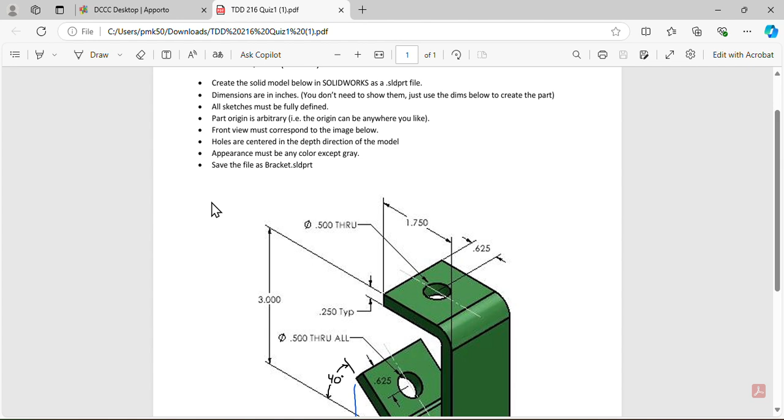Hey everyone, I'm going to go through one possible solution to the quiz that we had last Monday. Of course, there's different ways to do it, and feel free to ask me in class if you want to discuss other methods. In fact, after we finish lesson 7 this coming Monday, I'll show a really easy way to do it. But for now, I'm going to show methods that I know everybody has learned up to this point.

So this is the isometric view, and first thing with any object is you want to think about what the best profile is, what that first sketch should be. And in this case, it's the front view, which has the most shape. So we're going to start on the front plane, and then the next thing you want to think about is where the origin is going to be.

So the origin, as it says in the bullet points, is arbitrary. We could make it anywhere, but we want to constrain it to that sketch somehow. So I'm just going to make it in the lower right corner, on the outside or inside, we'll see.

Okay, so jumping into SolidWorks, if I click New, I've got the training templates in here now, so we have millimeters and inches. If you're just seeing the 3 default templates, click the Advanced button in the lower left corner, and this is going to be a part inch.

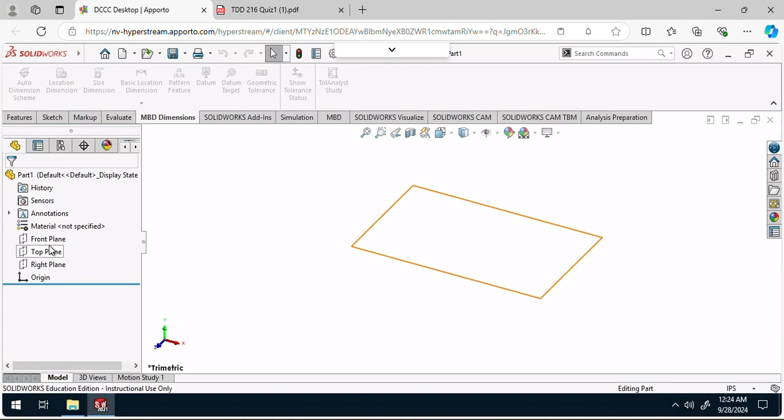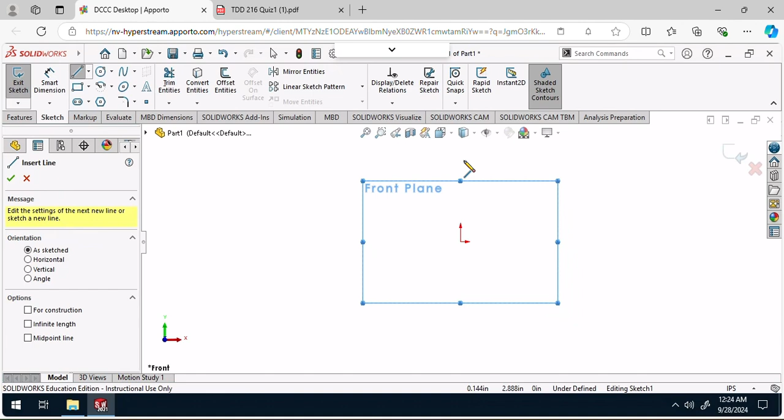Okay, as I said, the first sketch in this case is going to be on the front plane because that's the best profile for this particular part. Now, my origin is going to be, as I decided, in the lower right corner. But in order to just keep this one single chain of lines, I'm going to start away from the origin and then constrain to the origin.

So you don't have to do this, but if you notice when you're in the line command, you've got the XYZ coordinates on the status bar. So I know my part is 3 inches tall and about 2 inches wide. So it's helpful sometimes to just get in the approximate location.

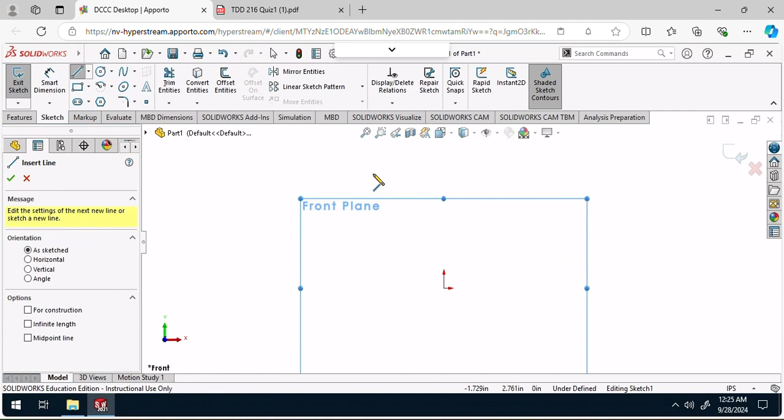I got negative 1.7, 2.76 is fine. And then I can come over and you see that dashed line tells me I'm vertically aligned to the origin. So when I can come down, I can get coincident and vertical at the same time. And then I just come over and then up. I'll just right click and chain, and escape.

So based on the dimensions I'm given, this is going to be the outside profile. And the other thing we notice is it's 0.25 inch typical thickness. So because of that uniform thickness, we can use offset. And as I always say in my 112 class with the 2D AutoCAD, when you're doing an offset, you want to make sure you do the fillets before you offset. Just makes it a little easier.

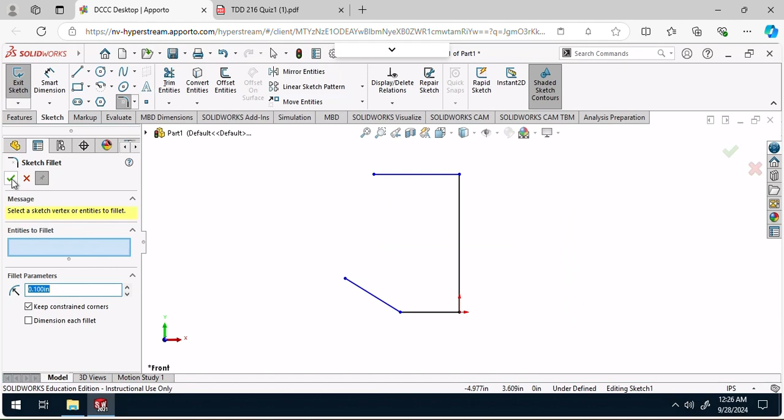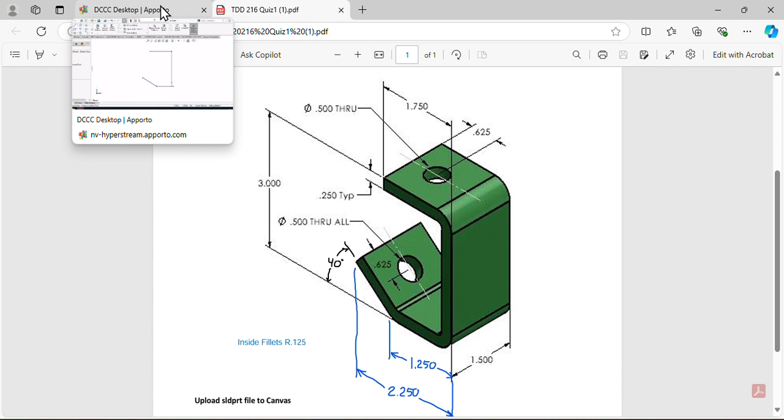So I'm going to get the fillet command, and now I also realize I'm going to cancel that. If I look at my dimensions, I have this 1.25 inch dimension going to the corner that has been rounded off on the outside by the fillet. So if I do that fillet before I do the dimension, I'm going to not have a point there. Now there's a couple of ways to deal with that, but what we've learned so far, I'm going to go ahead and dimension first.

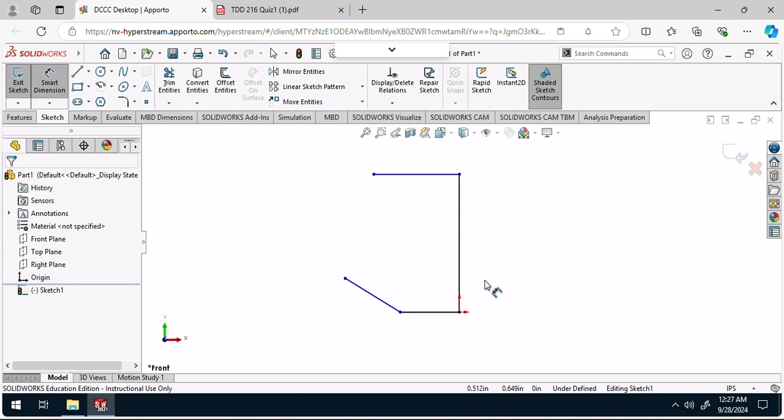Also when you're offsetting, if you didn't really think about the scale, how far zoomed in and out you are, whenever you do offset, it's just good practice to do the dimensions before you do that offset or before you do the fillets. In general, I like to sketch all my lines and then I'll do the dimensions. But certain cases like this, we'll want to do the dimension first because we're going to lose this corner. And there is another way to deal with that, but I'm just going to go ahead and dimension it.

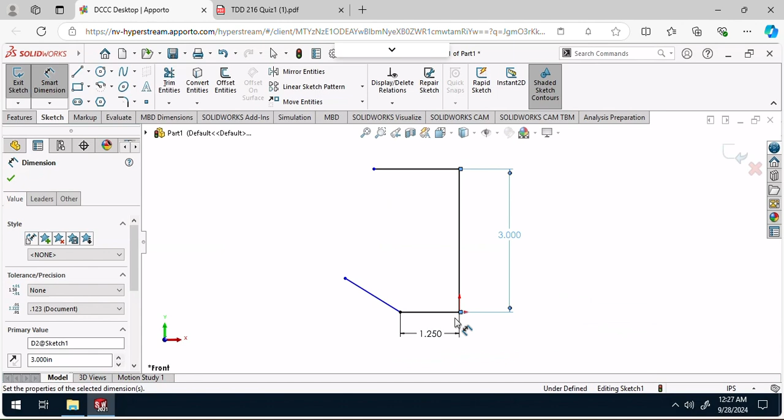You can see I sketched it looking at the coordinates. It's almost the correct size. It's 1.25, and these were my outside dimensions: 3, this was 2.25, and we have 1.75.

Okay, so okay that. So now I can do the fillet. And when you look back at the dimensions on the isometric view, actually it's in a note. The fillet says inside fillets 0.125 inches, but we sketched the outside. So there's a couple ways to deal with this, but we're going to calculate what the outside radius would be.

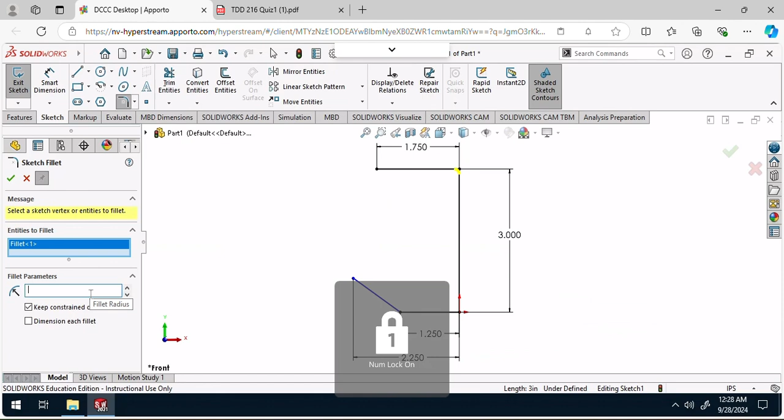So if it's 0.125 on the inside and it's going to be a 1/4 inch thickness, we're going to take 0.125 plus 0.25. So the inner radius plus the thickness gives you the outer radius, and it ends up being 3/8 of an inch, or 0.375.

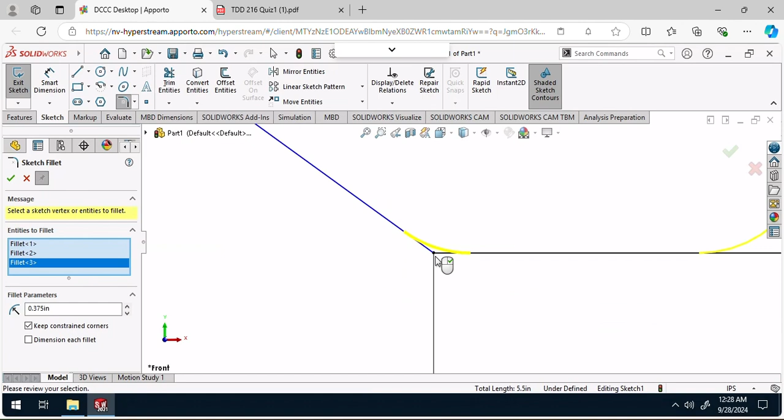And while I'm in the same sketch fillet, I can go through and do the other two fillets. So that was the corner that I'm going to lose that I was talking about. Keep constrained corners so that 1.25 won't lose its place.

Okay, now I can offset, and you just pick any of these lines. It's going to take the whole chain of lines, and I can type in 0.25, enter.

And then the only issue I see now is the ends are open. You could draw lines in there after the fact, but there's a checkbox option that says cap ends over here in the property manager. It defaults to arcs, but you have lines or arcs. Kind of reminds me of the multi-line command in AutoCAD. So we want lines, that's the easy way to cap that off.

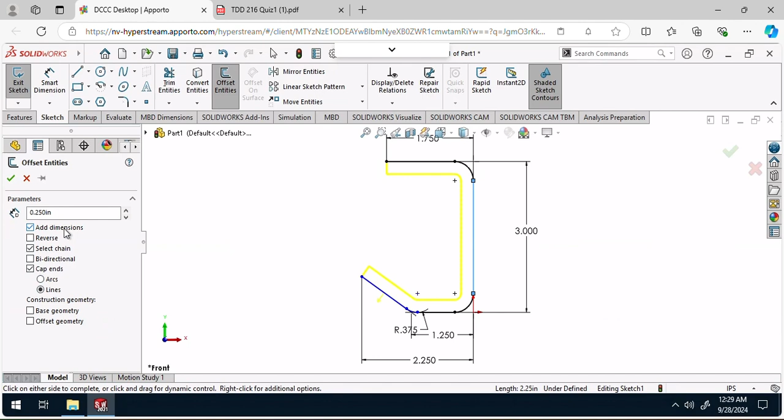It's automatically going to add the 0.25 inch dimension. We can just drag that out to make it easier to see.

And then we are still underdefined, so I forgot to do the angle down here. So for an angle, just pick one line, pick the other line, and we can put in 40 degrees. And now we're fully defined, so we always want to make sure that's fully defined.

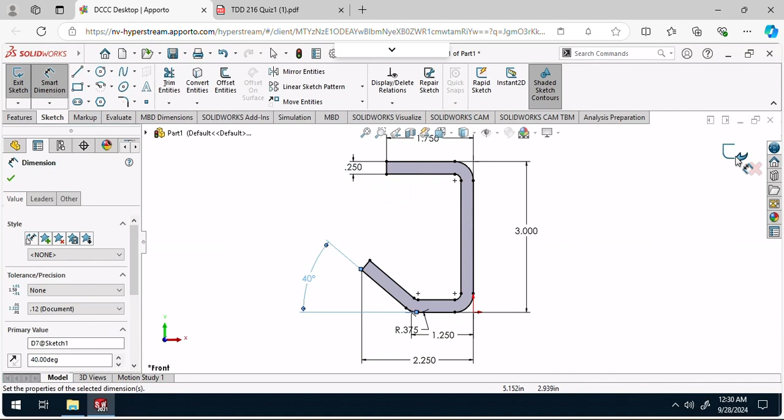And then we can exit the sketch and extrude, and this is going to be 1.5. And I'm just going to hit OK.

And then we need to do the two holes. So this is just a simple hole. Oftentimes I'll just sketch a circle and extrude cut it. A lot of people use the hole wizard, which is also fine, and I'm in a hole wizard mood, so I'll do the hole wizard.

And we have it set for simple hole, or just hole. It's set to dowel, 1/2 inch, which will work. Drill size will also work.

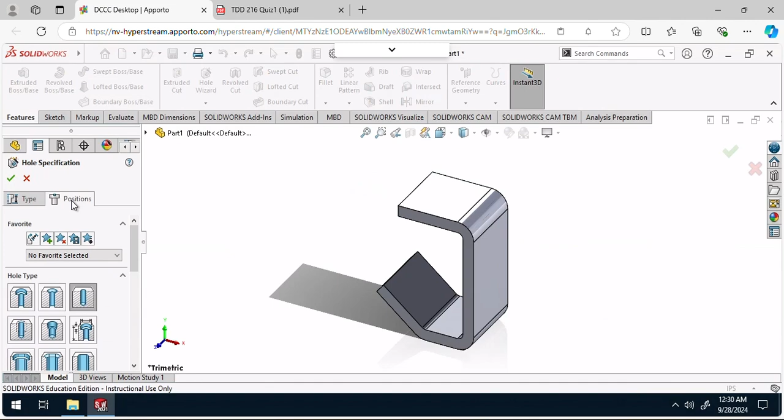So once you have the position type set, go to positions, and we just plot a point there. Now notice the pencil icon, you're in a sketch just like any other sketch, so I could add relations, draw construction lines,

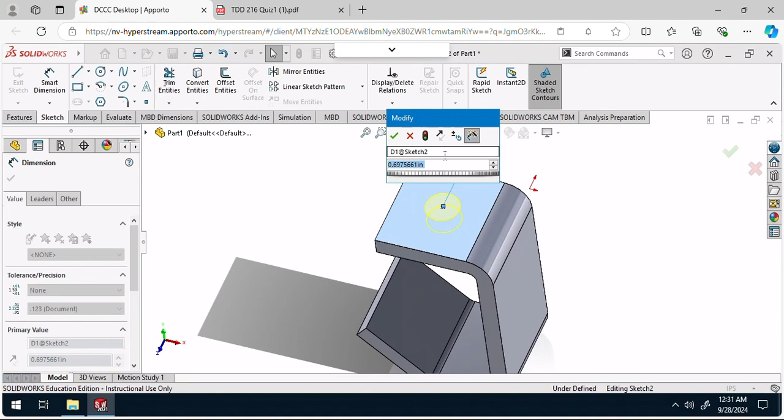dimensions. So we know this is 5/8 of an inch from this edge. Now it's supposed to be in the middle, so it's perfectly acceptable to dimension the half width of this, but I'd prefer to use a relation, so I'll get out of dimension.

And if I just click this point and hold Control and then hover till I get the midpoint, I might have to right click sometimes, like midpoint. Then I can add... or try this again, let me get the midpoint first.

I had a little trouble with that, so what I'll do is just draw a line from the midpoint to the center of that, and then I'll click on the line and just make it horizontal. All right, so that's fully defined.

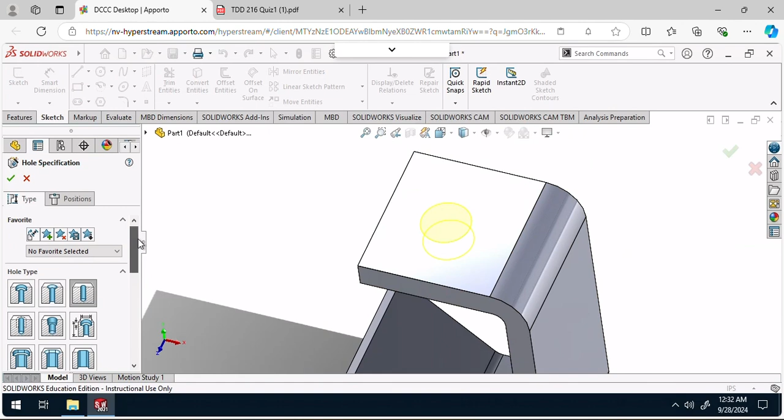And oh, the type, let's look at the depth, because I don't want this to go all the way through to the bottom. So oftentimes the default will be, I don't know, either be blind or through all, or just whatever the last one you use. So I definitely don't want through all.

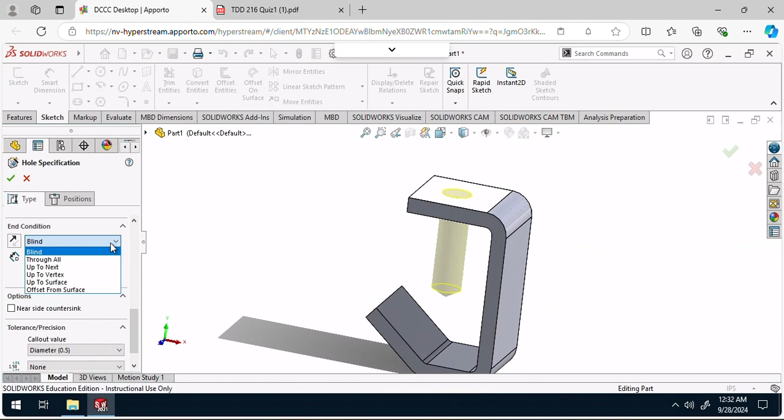If you do blind, that'll work, but then if you change this, you want to make sure it's always going to cut enough of the depth. So up to next is a good option here, because then it'll just go to the next face and stop. Alternatively, you could do it on the bottom face and extrude up all the way, which I'll do for this hole.

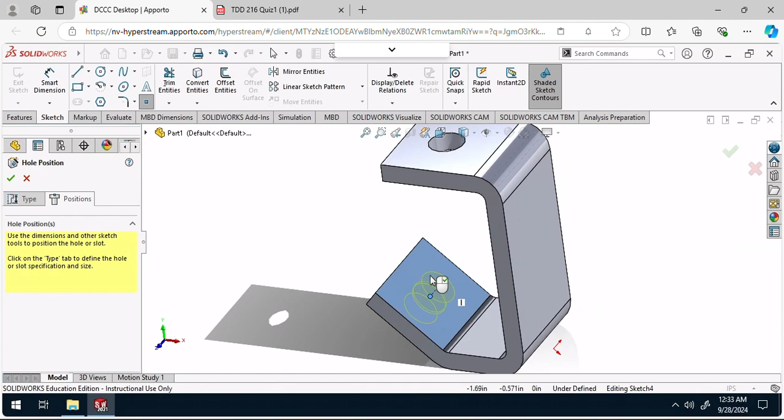So I'm going to do hole wizard again, and it should be all the same. Go position, go on there, and then do my center line again from the midpoint.

Make that horizontal, and then put a dimension in here. What was it from this edge? 625.

And then this one we can do up to next or through all is fine. Either one would work.

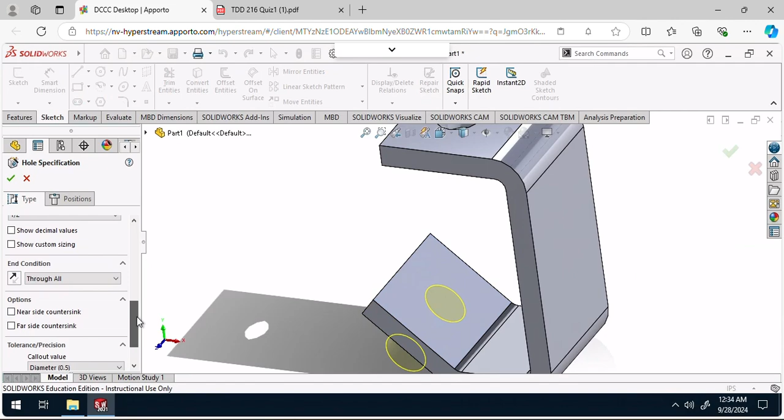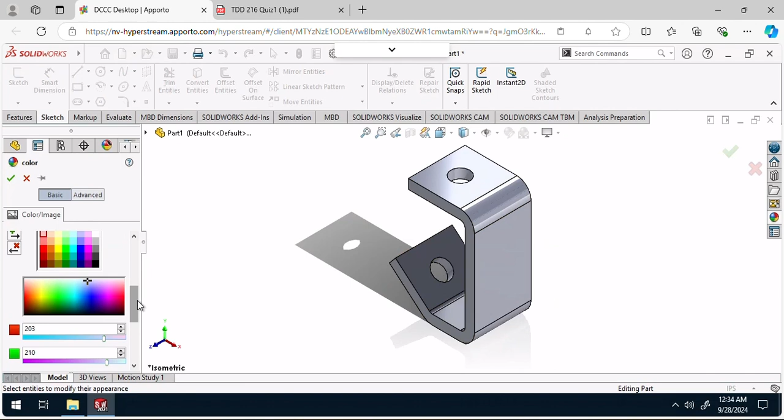Okay, and then the last thing you had to do was apply an appearance. So right here on the heads up view toolbar, one way to do it is click edit appearance. And then the task pane opens, which you can go through these folders and find an appearance, or you can just go into property manager, scroll down, pick a color out of here, and say okay.

All right, and that is the finished part, I believe. Yes.